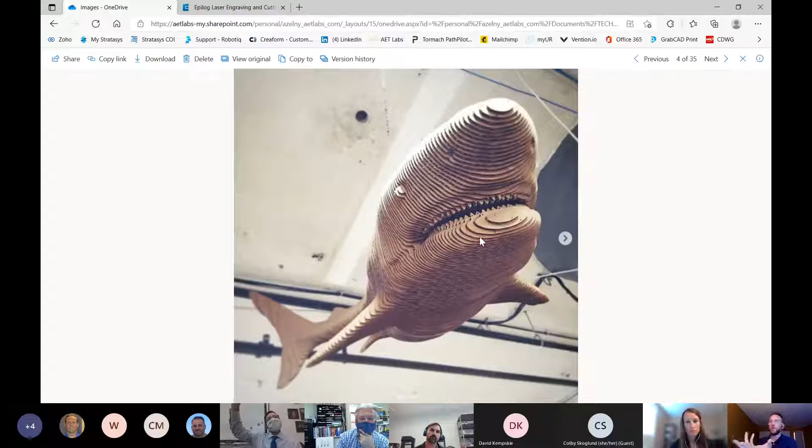Here's a really cool makerspace project that some members did together. So this is all laser cut cardboard. And each of these pieces, the designer of this essentially numbered every single piece and gave instructions in order to assemble it into this 3D shark. Really, really cool project.

Here we have a hinged box. This is just kind of a raw version of it, but this is something that I've actually done with teens in a workshop and adults. And one thing that I definitely stole from someone else's design is this really wonderful bearing design in the sides of the box in order to open the lid. Really cool, clever way to just have everything laser cut.

So furniture, load-bearing furniture is something that I want to talk about today, and that's an example of this right here. I actually have a version of this in my home office that just sits against the wall and holds some stuff like books and instruments and so on. And here are some folks in a workshop that I did at a makerspace in Worcester assembling this piece.

Okay, this is, oh yeah, let me see. If you're new to laser cutting or laser engraving, you might often see glass or wood or maybe acrylic, but what we may not see a lot of is leather. And this is just an example of how beautiful laser engraving looks on leather. And you can see by contrast, to the right of it, there's a rough engraving, but leather and fabric in general is something that I don't see a lot of people doing, but the laser is ripe for incorporating into clothing design and fabric, jewelry like earrings.

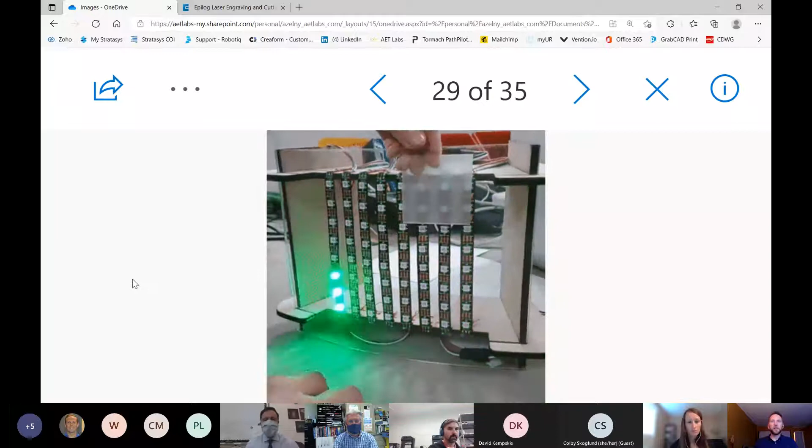So this is just a prototype of a bigger project I'd worked on with a couple of folks. We were making an LED screen, kind of like an artistic installation, but the whole housing for the project is laser cut.

And one thing that I haven't talked to many teachers about is: are you using laser cutters for more than just engraving stuff, making structural things? In this case, you could make a jig for something. And I really was excited to show you this because this is a jig I made to bend a piece of acrylic, and my goal was to heat the acrylic so it would hold the bend. It did not work well, but still it was a pretty neat idea to begin with.

I had never done anything like that before, but all the same, I want to show you this because it didn't occur to me until this time. I was like, oh geez, could I do something to bend this acrylic? I could quickly design something to laser cut that would hold the form. So that's kind of thinking outside the box with the laser, which I like.

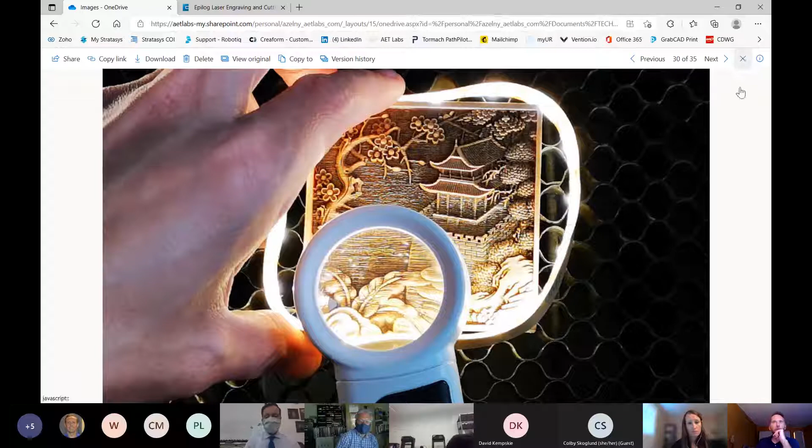Here we have some stuff that is pulled from Epilog Laser's website and some other content from other users, but if you really get into the engraving workflow, lasers, especially Epilog lasers, are geared for this: lasers are capable of doing 3D engraving. I might not touch on that much today, but if you're interested in talking about that a little more, it's a really interesting process, so we can definitely do that. And here's another 3D engraving.

Those of you who've used or have seen rotary devices on CNC machines, it's really a great tool for the laser. We package these Epilog machines with the rotary tools a lot, and it's fantastic for students. They're very easy to use. It's plug and play, and I think students take off with projects, as simple as engraving the school logo on a glass or a water bottle, to developing their own logos or designs for community events or personal use.

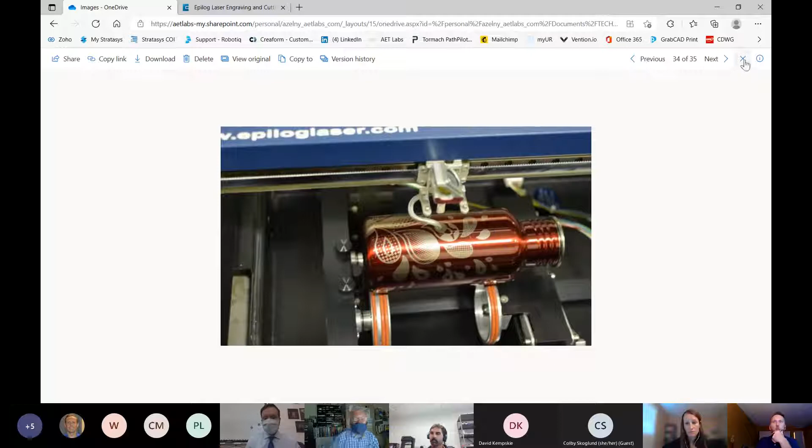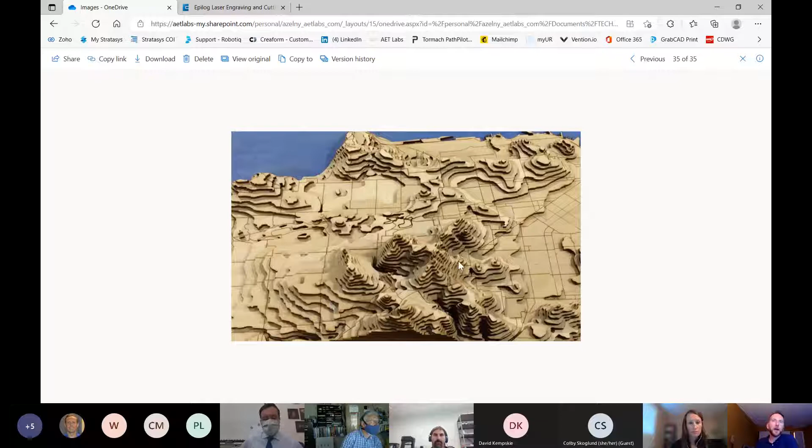And the last one I have is just a 3D rendering of a topographical map. This is an interesting process where you can separate graphical data by color. So if you have a topographical map that is rendered in grayscale, you could essentially pull out all of the profiles of each level of the map, and that could transfer over to a bunch of separate profiles in the laser, where you can cut all these shapes that eventually will stack up to create the 3D topography.

I'm going to switch gears right now. So does anyone have any questions? All right.

Okay, so the next thing I'm going to jump into is the software side. Now, when we work with lasers, I should actually just open some software for you here. But a lot of folks are working with 2D CAD, and that is kind of your default workflow to get to the laser cutter software. You start with 2D CAD, you send your 2D document over to the laser, you set your profiles, and you go ahead and

Oh, looks like we do have a couple questions. All right, hold on one sec. I got to turn my phone to silent mode. Kristen, can you see those questions?

Yeah, from Frank. There he is, he just waved. He's curious about material vendor suggestions. Oh, material vendor suggestions? Yeah. Materials, so I do have a link to Epilog's website, and I know that Epilog, when they ship their lasers, gives you a plethora of vendor samples. So we might have to tap into their website and see if we can find anything.

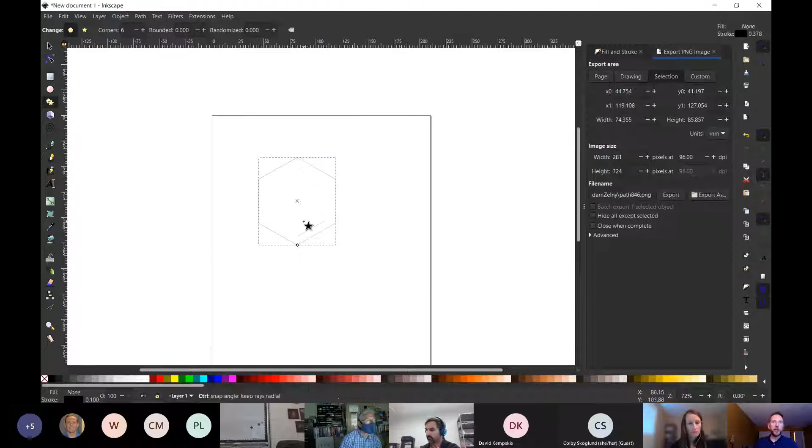So, all right, let me do a share here. Okay, so our typical onboarding workflow with the laser is using some sort of vector-based 2D CAD software. In this case, I have Inkscape open, where we might do something like create a shape, and we might go to Google and look up an image.

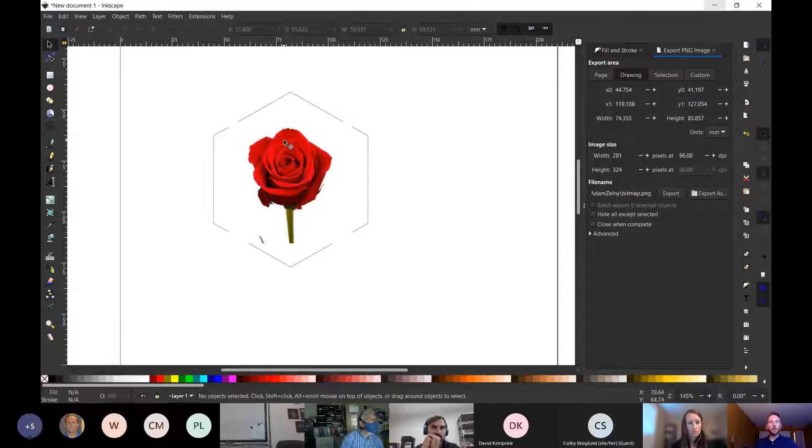We might send something like this over to the laser, where we can start off by talking about rastering, which is the laser's interpretation of pixelated art. So this would be pixelated art here.

You can see that it's blurry as we zoom in, versus vector art, which is geometry, lines connecting points. If we zoom in, nothing changes. It doesn't get pixelated because it's essentially representing a tool path the laser will move on.

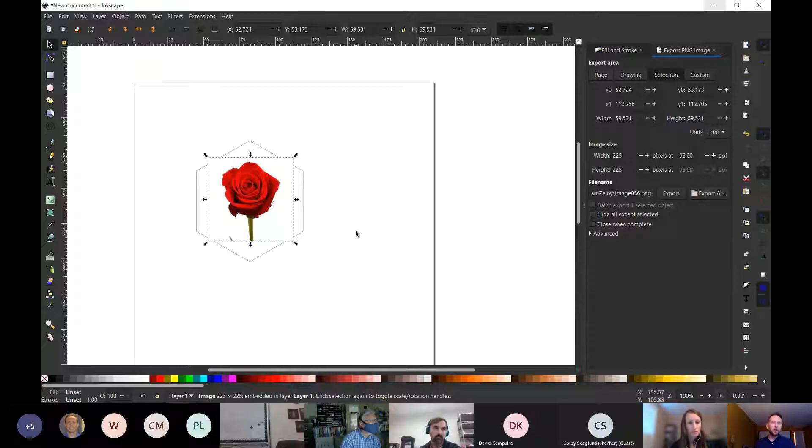And it's a great way to get started. You can even do 3D design. If you have the capacity to plan ahead and have that strong visual thinking, you can lay out slots in a shape and have things connecting to a shape you create in another area of your document.

But if we really want to take advantage of structural design, we can switch over to our CAD software, something like Fusion 360. What I'm going to show you here is, I don't want to say simple, because I've worked with people before who struggled to get the concept at first. I think that despite the fact that our students can be on electronic devices a lot, this does boil down to some thinking they may not be used to.

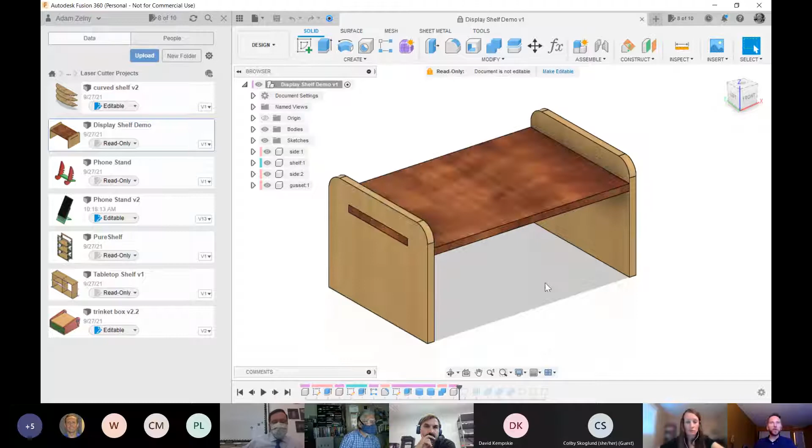Right now it looks not necessarily appealing. It depends on what type of person you are. If you're really excited about having a miniature table, which is like 20 centimeters wide, then that's great. But the purpose of this is to onboard somebody brand new to parametric modeling to, A, the principle of it, and B, the laser workflow.

And you know what I should do before I show this off is show you just one other slide here.

There's a question about any ideas for introducing kerf to students. Sure, a saw blade, like a hand saw, would be a great way to introduce kerf to students. If you have a miter saw, a miter box, or a safety saw depending on your classroom environment, having them hand saw a material like a piece of pine and talk about the fact that they completely made sawdust and removed a portion of that material is a great way to start.

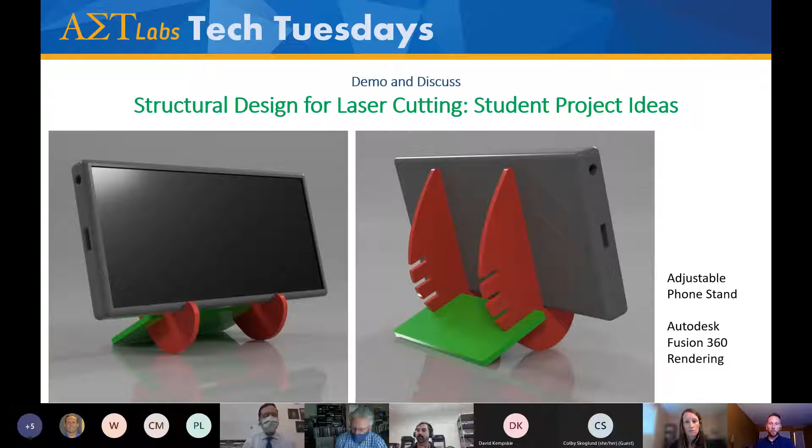That's a nice, clean, easy way that doesn't involve CAD to talk about kerf. And that's great that that's brought up, because my next thing was just to bring this slide up. So before we launch in, the central question is: what is parametric design, and why is it well suited for digital fabrication?

I just made a couple of points here. I'm not big on packing content into slides, because I want to engage in a little show and tell and discussion. But the two points here are: CAD sketches and models are created using variable dimensions that can change relative to one another, which is essentially what parametric modeling boils down to. And the second is dimensions can be quickly adjusted with respect to the size of the material being machined and the kerf of the cutting tool.

So you're going to be working with different sheets of stock, and your stock is never going to be consistent. You'll have a piece of plywood, acrylic, or cardboard. Cardboard's pretty consistent probably, but plywood specifically, you'll find a lot of different widths, and your artwork may need to be updated for that, especially in structural design.

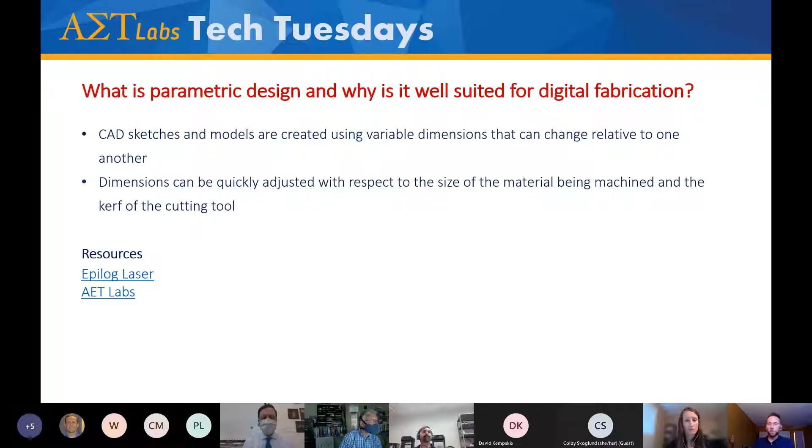So let's pop back over to Fusion.

What we're looking at here is, at current state, a 3-component assembly. This assembly consists of 2 sides and a shelf, and you can see that these are assembled by tab and slot joints.

One thing I love about structural design with laser cutting is it really lends itself to talking about woodworking. So especially if you have students taking a woodworking class, you get to talk about joinery and joints and how things fit together structurally. But we have some constraints with digital fabrication, because we're working with flat stock, so we can only get away with certain types of joints. Tab and slot is really common, and mortise and tenon is another type.

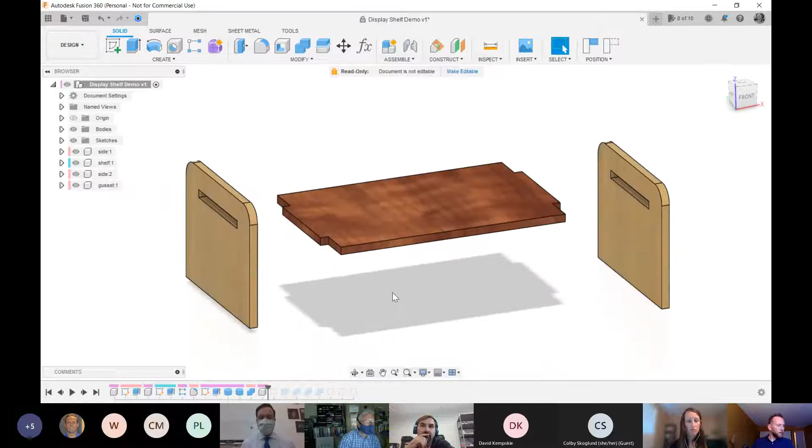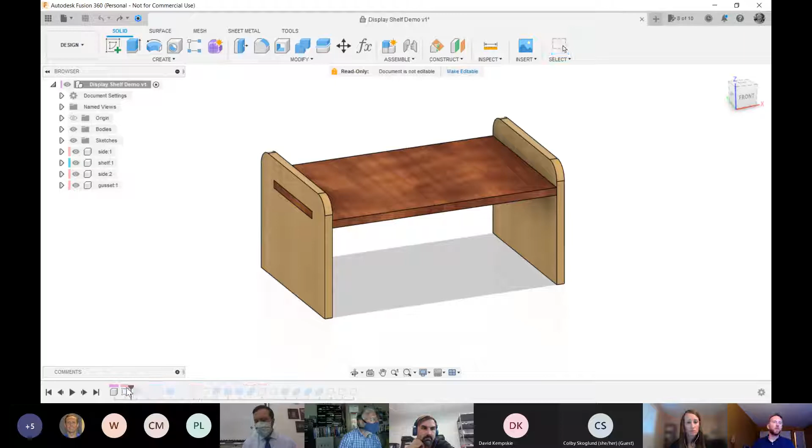So let's dissect this a little bit here. If you're not familiar with Fusion and you are questioning your current 3D CAD platform, this is one thing I love about Fusion - I think a lot of other CAD has this too - is this timeline down here. So I can slide this all the way back and show you what this project looked like at the beginning. And this was it - that was my start right there.

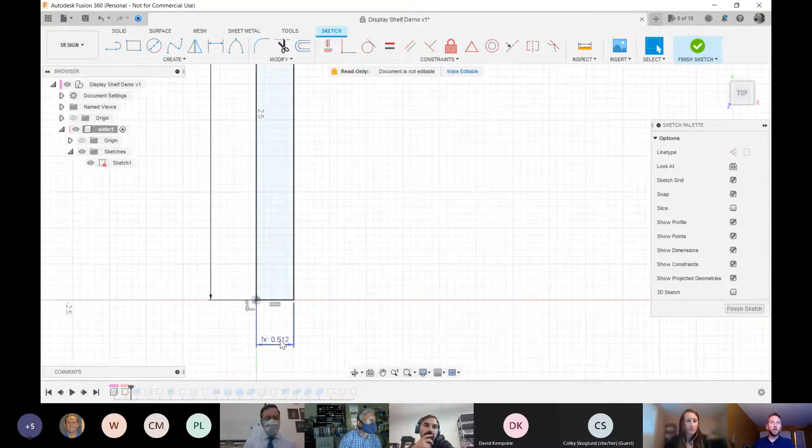So this is just a side profile with a dimension, in this case a parameter. This parameter's depth, and this parameter is thickness, which is a big one, right? So let me pop this back up.

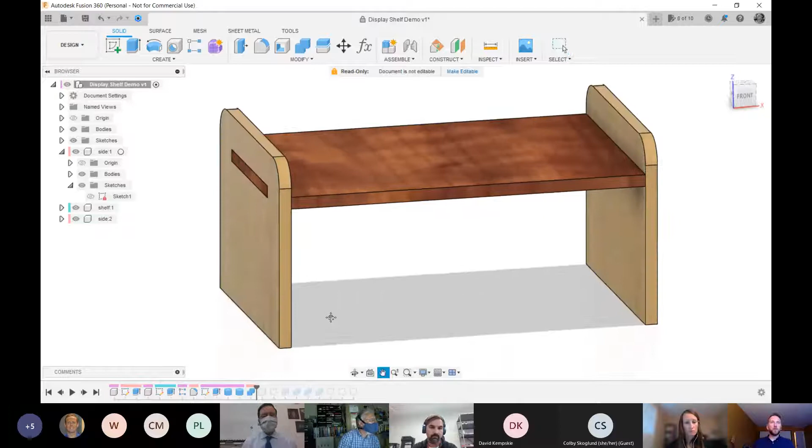All right, so right here we're working with something like 1/4 inch, or a little bit less than 1/4 inch, plywood. But if I'm doing a joint, I need to make sure I know that the thickness of this slot right here is going to accommodate for a tab and slot joint.

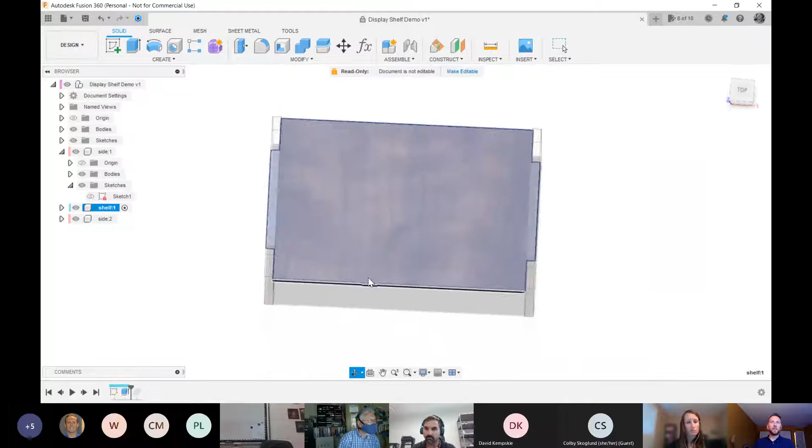So what I do is when I'm creating my sketches - I'm trying to remember where I actually did this sketch - oh, I think it was the shelf itself. So when I created the sketch for the shelf...

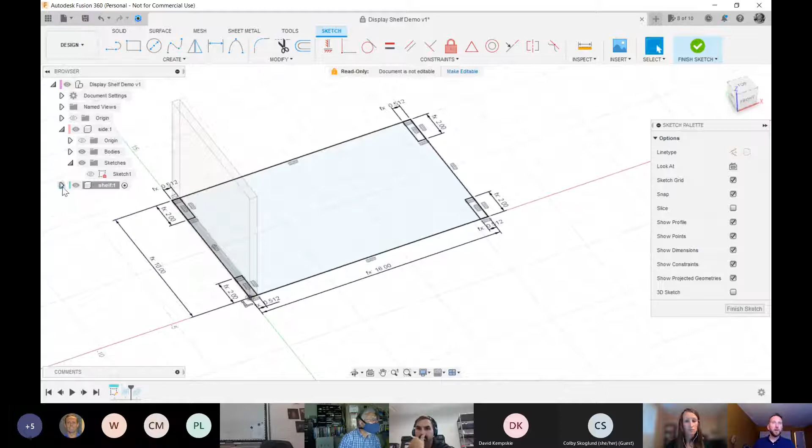I assigned parameters to the sketch with respect to the tab, kind of the length of the tab here, but equally important would be the thickness of the extrusion. And in this case, if we look at the extrusion, we can see that my variable is actually titled thickness.

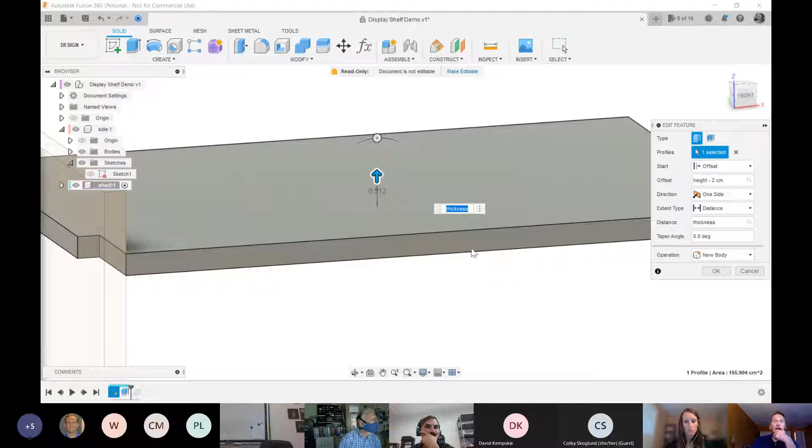Now, at the heart of parametric modeling are parameters, and these parameters are often what we start with. Whenever I start with my designs, I do a sketch first, and I visualize in space with a ruler or a tape measure or calipers at my desk, and I say, what do I want this to look like? Just a rough idea.

Because in parametric design, we can change this to be any size, or just about any size we want, within some limitations. So I make a variable called height, width, depth, thickness, and I add values or expressions to each one. And one thing I love about parametric modeling is math is inherent. So those students who hate math, those students who struggle with math or can't do worksheets - this is where we can tap in and get them excited about math.

Because when we actually apply math to parametric modeling and see changes happen right before our eyes, it's wonderful. I hated math in school, and when I got into parametric modeling, I became a nerd about it. It was great. So yep, here are some values here.

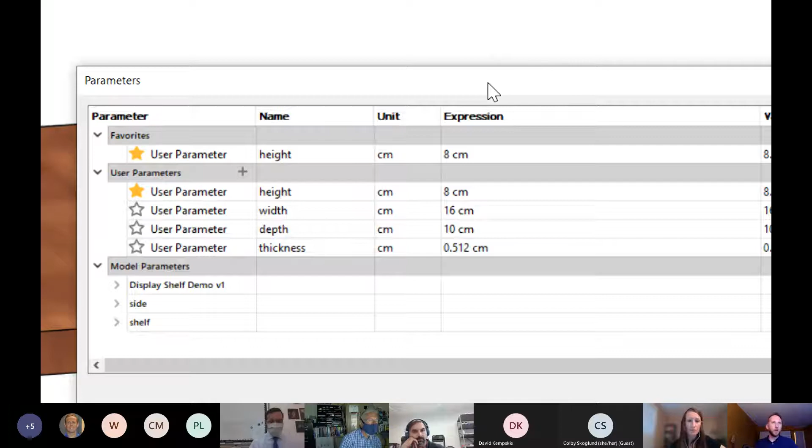This thickness right here, 0.512 centimeters - that's a caliper measurement for my plywood. So I use digital calipers and measure the thickness of the plywood and add that. Of course, it doesn't have to be that - you could start off with something kind of rudimentary, just like 0.5 or 0.4.

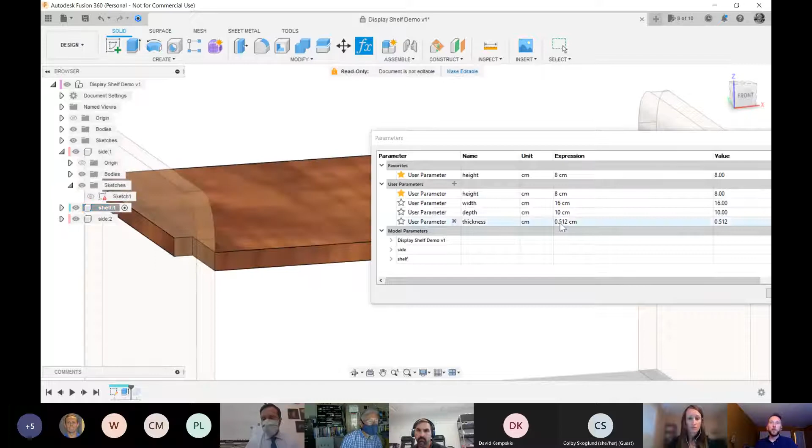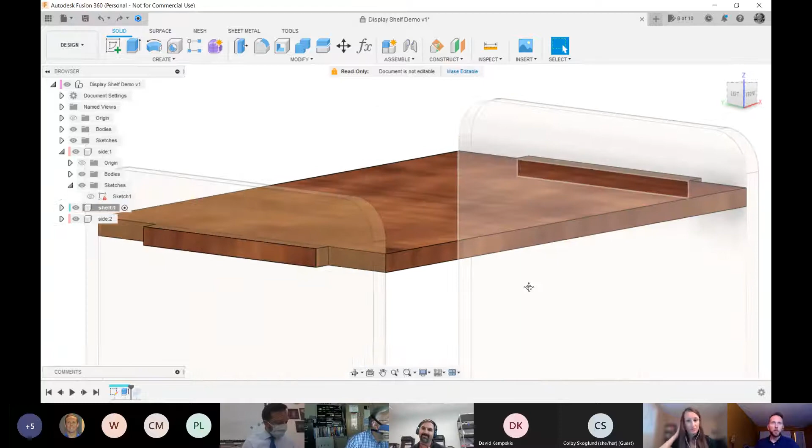And because I have that value attributed to the extrusion, if I change it right here in my parameter spreadsheet to something like 0.75, you can see the shelf panel gets bigger. Not only does the shelf panel get bigger, but everything else updates as well.

So I have two sides that have slots in them, right? And actually, I could just take this apart so you can see it like this.

And when I go into my parameters and change my thickness to, I'm going to do 1, you can see the slots adjust, the tabs adjust. And if my stock is - if I've done an accurate measurement of my stock and understand a little bit more about kerf of a laser cutter - then I will machine this and go to the next steps to machine it and have a really cool project that I can assemble.

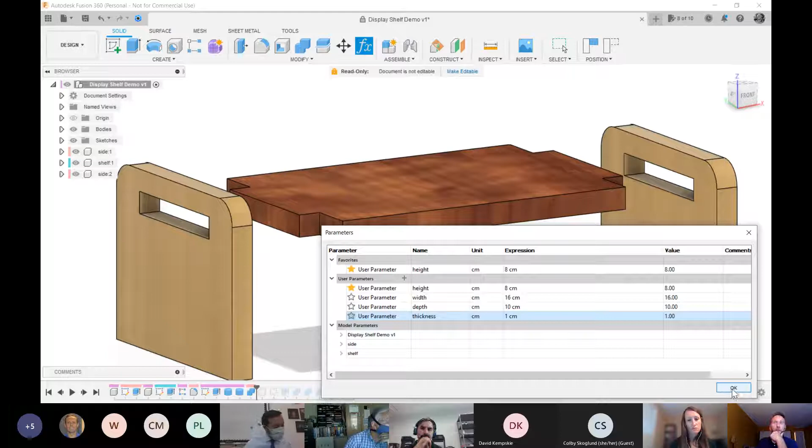At this point I wonder where you and your students' heads are at right now. Do we ask the next question, like, is this structurally sound? What's the answer to that? What would you change? How would you change it? What would your students say? I'd like to invite you right now, if anyone would like to speak up, what's the next step from this? Do you have any ideas? Where would you take this in your classroom? What would your students do with this? Would they be bored by it? Would they kind of take off in imaginative ways?

Would someone be able to assist - this is Casey - in taking Revit blueprints and cutting them on the Epilog Zing? I think you'd need to share the file with me, Casey, in order for me to dig into it a little bit more. I can add a link to my email so you can get in touch with me that way.

Tony asks, do you measure whatever you are using with a digital caliper to be as accurate as possible? You gave a thumbs up because I already talked about it, but yeah, digital calipers, absolutely.

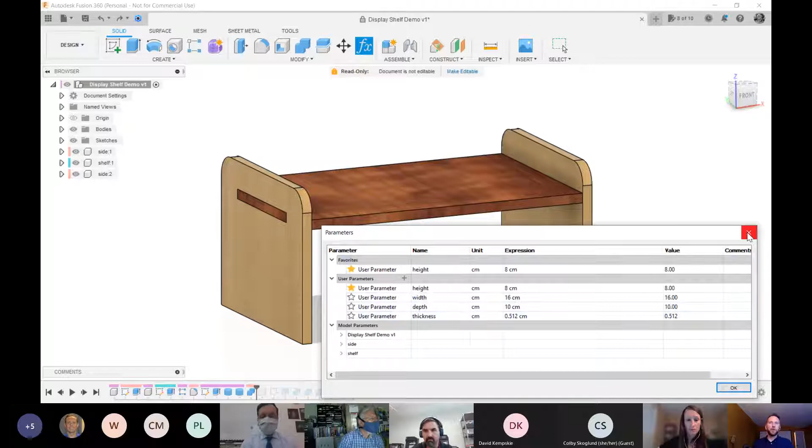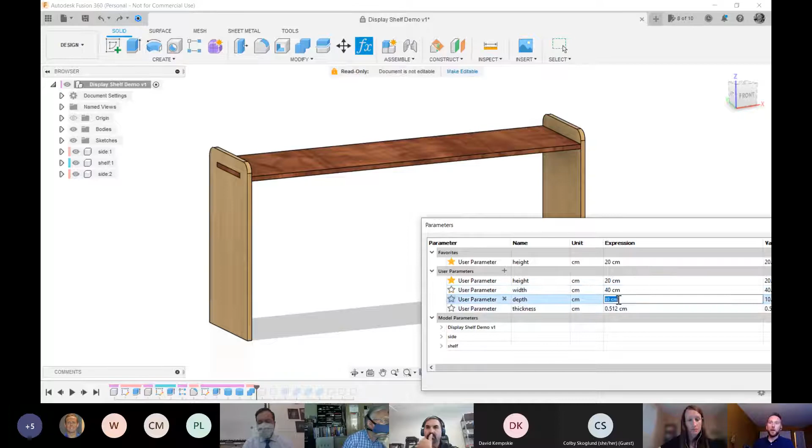Yeah, great. So the next thing I would do from here, I just want to take you on the workflow at this point. Once you've completed your CAD, I want to point out that because I have the height, width, depth, and thickness parameters attributed to a lot of this model, it doesn't just change with the thickness. My height will change if I go to 20 centimeters, then my structure will get taller. Or if I change my width, it can get longer. If I change my depth, it becomes a completely different thing - at this point it's bordering on a coffee table.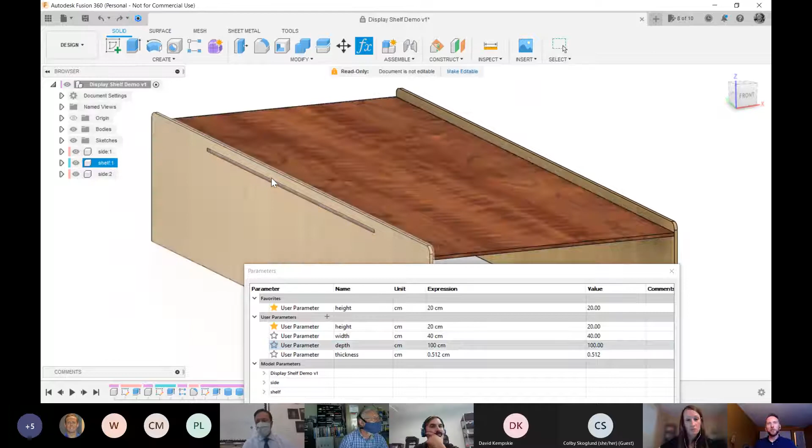I'll also point out that you may have noticed the slot also changes - it changed in size. If you're not too familiar with parametric modeling, this is a great way to start. It's just a simple division equation to do that, and I want to show you that right before I jump into the next thing.

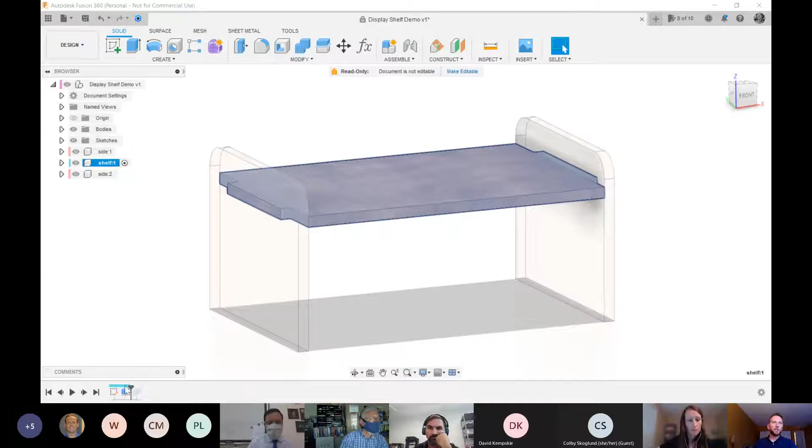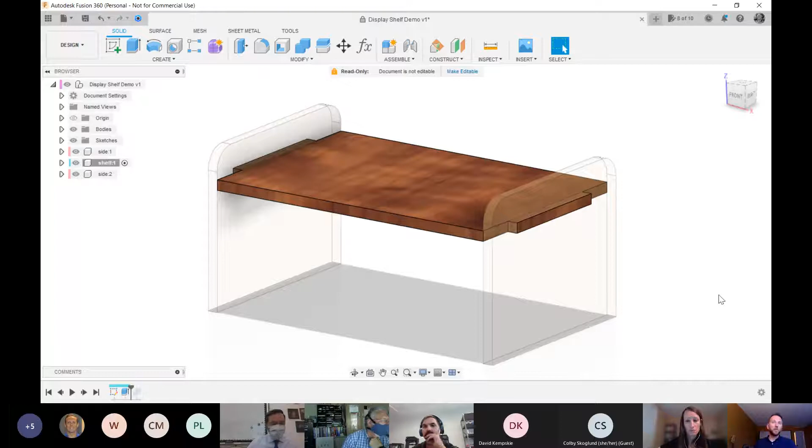That equation is detailed in the shelf sketch, because the shelf really is responsible - the shelf has two roles. The shelf sketch has the tabs, but also the shelf itself, the three-dimensional model, was used as a subtraction piece to remove the slot from the sides. So in my CAD software, whenever I change the shelf, that subtraction piece - this slot right here - is also going to change, because I use the shelf to make that hole.

All right, so let's take a look at this sketch. I popped this up earlier, but we'll take a closer look. Notice I have fx before almost every single measurement here, and that's just representing a parameter - reminding me that I assigned a parameter to this. For example, this front-to-back measurement, if I hover over it, is depth. I know it's very small for you to see, maybe I could do that...

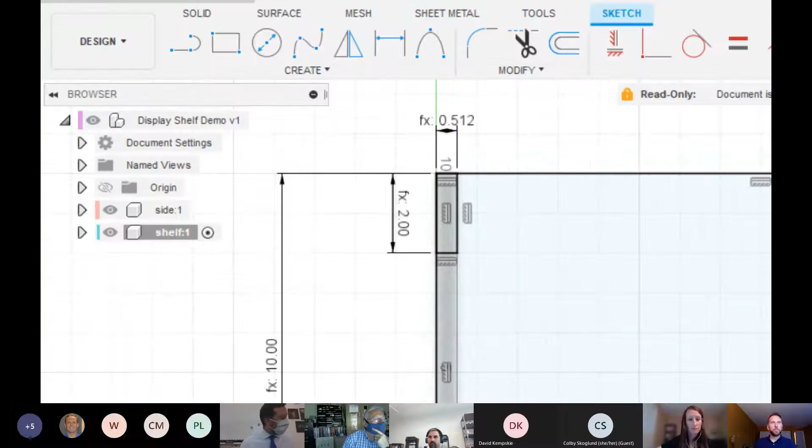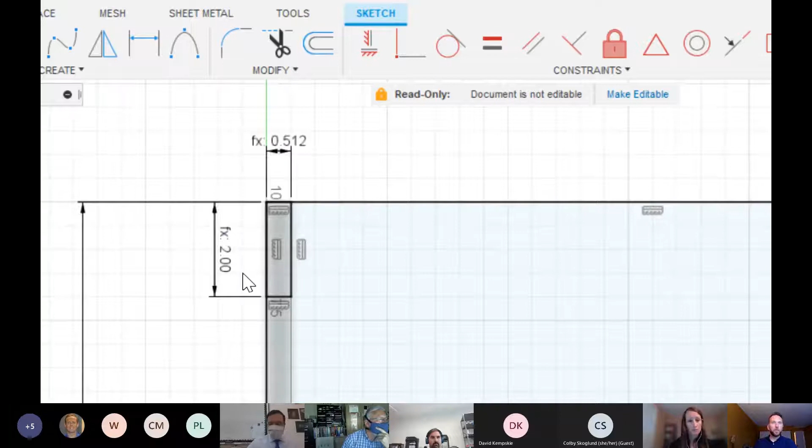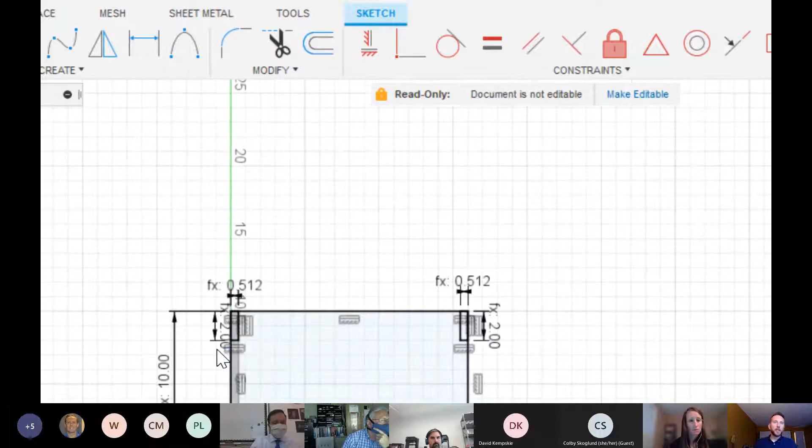So the magic is where the tab elongates based on my depth dimension. If we look at our variable, now I could have made this variable here - I could have made the actual slot a variable, but I ended up doing the spacing between the edge and the inner edge of the slot. This variable is depth divided by 5. So whatever I do, whatever I change with depth, is going to update this dimension right here to be depth divided by 5. In this case, it's 2 - it's just 2 centimeters.

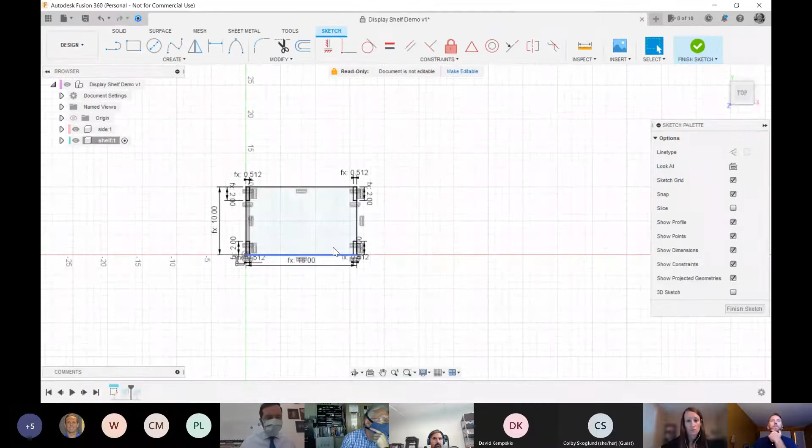All right, so that's kind of a quick intro on how you can bring in your first math equation to alter the dimensions of your model. And I think, if I'm not mistaken, that's all I did as far as actually having an equation - that's the only parameter that has an equation.

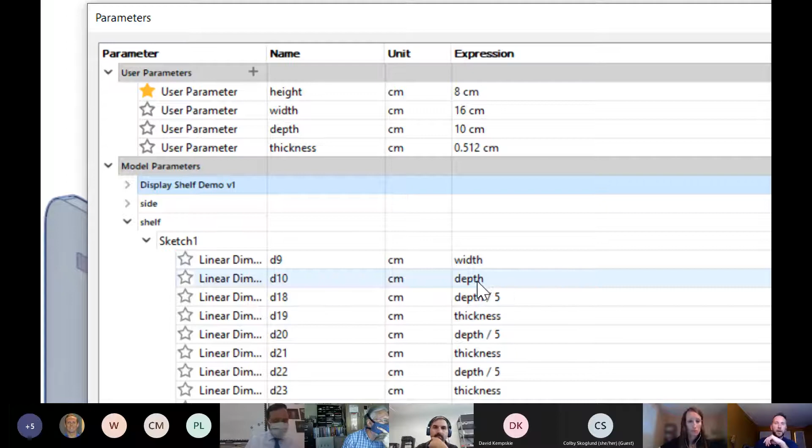What's neat in Fusion is all of this stuff gets captured in kind of the spreadsheet here. If I zoom in, you already saw these dimensions here, but down here I have model parameters that are captured if I enter them somewhere else on the model. In this case, in the shelf, I have all these things in the sketch that I added with depth, but here's depth divided by 5, which happens, I think, 4 times.

If this isn't clear, if I haven't been clear on that process and anyone wants me to reiterate, I can definitely do that. But that's just scratching the surface. If you really enjoy incorporating math into your designs, this can go in a crazy direction. And I have another example that I'll show you later.

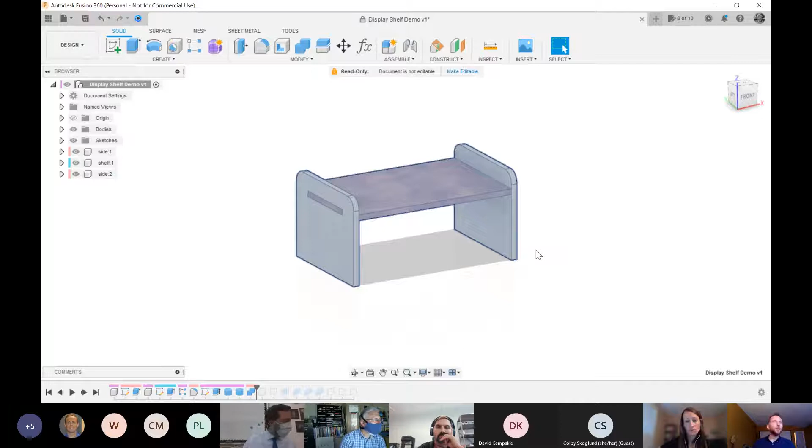Adam, we have some chat, if this is a good time. Yeah, go ahead. Okay. So just going to your question around how would you approach this project? Tony had suggested building a prototype out of something like cardboard, going to wood, and then building actual size, and using that as an opportunity to talk about different materials. Sure.

Yeah, there's nothing wrong with that. I think that cardboard's a good scrap material to start with. You have to be really gentle with it because if you start crushing it, then it kind of becomes useless. But yeah, you can cut it on the laser very easily, and it certainly has structural integrity. So why not?

Frank has a question that either you or anyone else could chime in on: how much time do you spend personalizing the work? Because students would want to add details like raster images and names. Yeah, I think this might differ school to school, but there are a couple of ways you could go. You could set aside a class or even after school time for students to

work specifically on the design side, or if you have any connection with graphic arts instructors in your school, that's a great place to start the conversation and say, hey, my students are looking to do these ornate engravings on their projects. Are you doing vector art with them? Is there any way this could translate over to our laser cutter workflow? And if anyone wants to have a further conversation about that, I'm always eager to hear about interdepartmental work happening at schools. I know it's challenging, but when it happens, it's really exciting, and I think the students get a lot out of it.

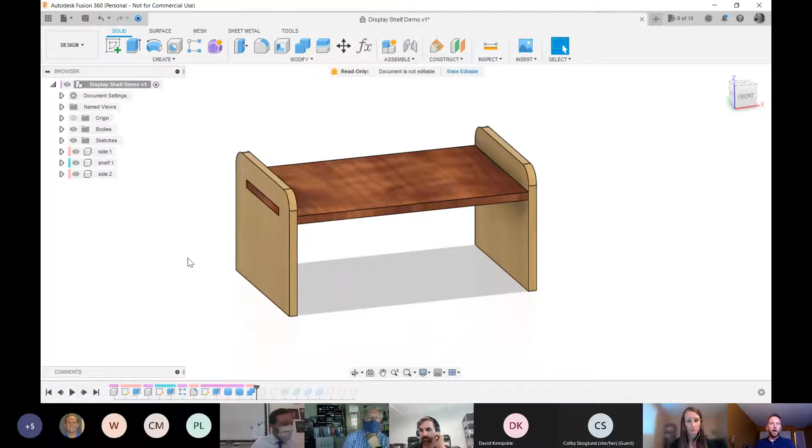Okay, so again, we have a fully parametric shelf that I have variables assigned to. At this point, I'm going to right click on any face of a finished model, a finished body, and I'm going to click Create Sketch and Finish Sketch. And then I'll hover on the shelf top and right click and Create Sketch and Finish Sketch.

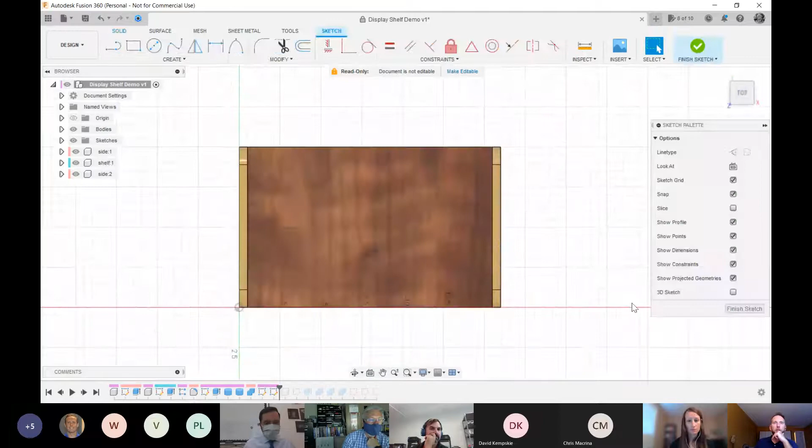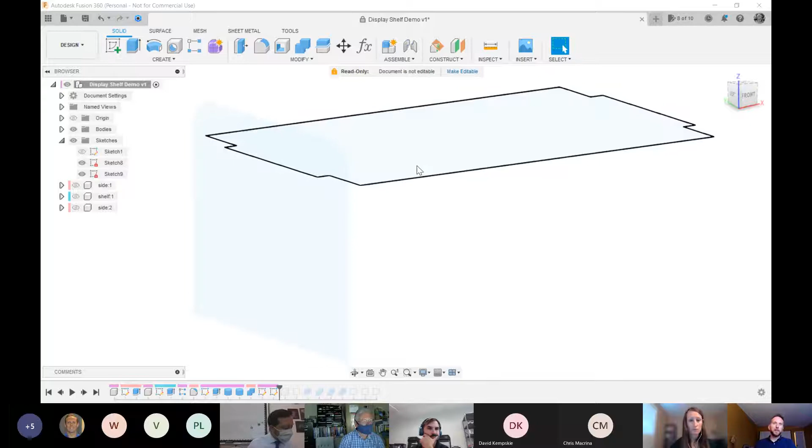What this does is it captures the live face, or the variable face if you will, of this 3D component. And if I hide everything here and just look at my sketches, you can see there are now two very light sketch profiles. Now, the beauty about this, and I don't know if it works like this in other software, is I say it's like a variable sketch, because if I go in and change my parameters right now, and I change, let's say, my thickness to 1, you can see that my sketch is updated based on what's changed in the 3D model.

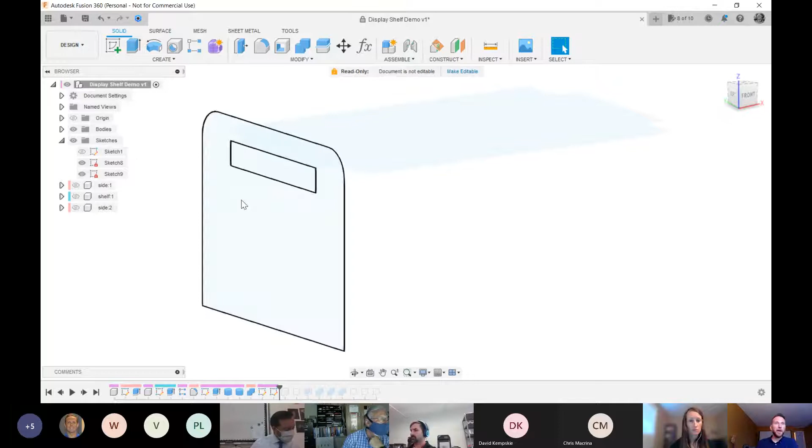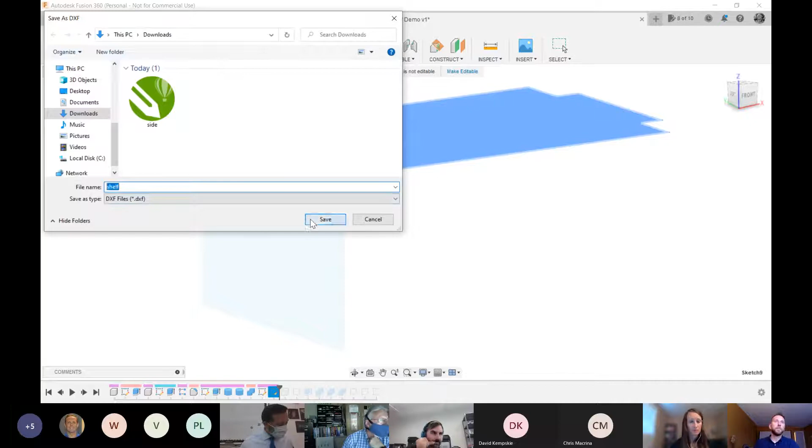And this is our last step, because at this point we have a variable sketch that we can change on the fly. And if this sketch matches our stock size, we can right click on our sketch, save as DXF, and we'll do side. Save as DXF for the shelf. And pull up our CAD software. And import shelf and side. Oh, I might only be able to do one at a time here.

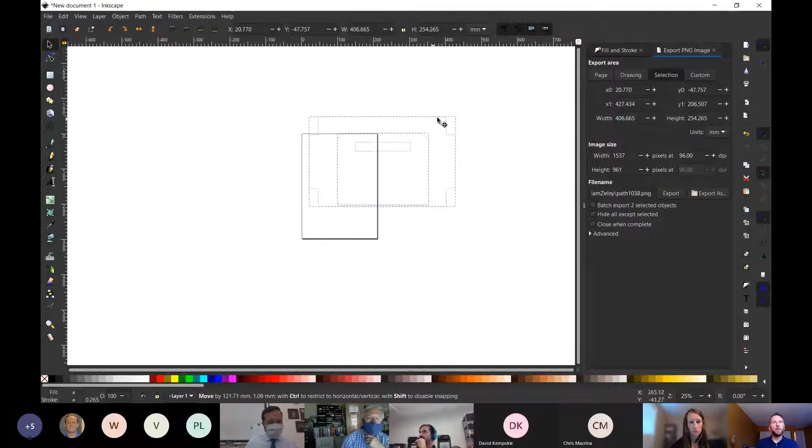All right, and what we're seeing here is probably not an accurate dimension, because you need to make sure that your 2D CAD is reading the unit measurement that you have in your 3D CAD. So for example, in Fusion I'm using centimeter measurement, and I would need to make sure my import is also in centimeters. In this case, it's probably not. But the ratio is correct, and you can basically see what's needed here.

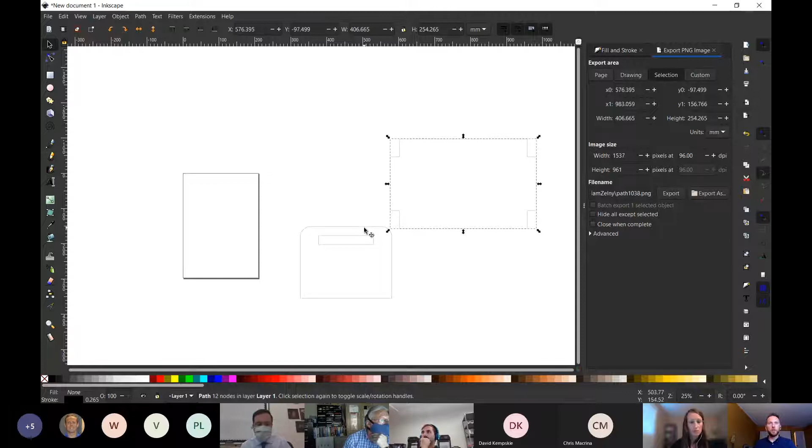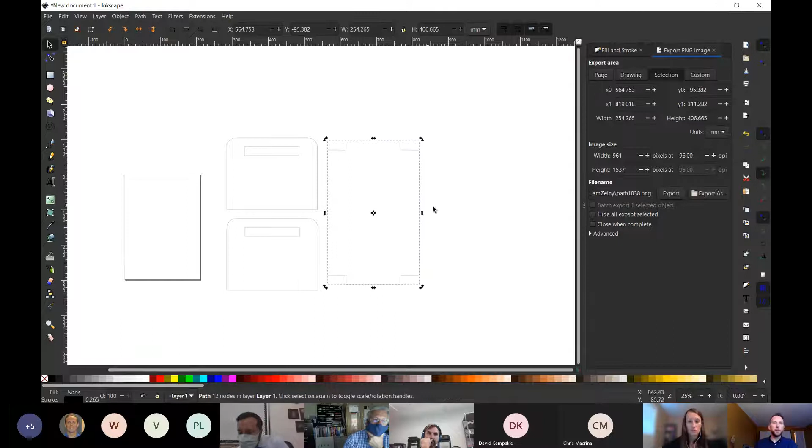So there's the shelf. Here is the side that I can just duplicate because it's symmetrical. And now I can do what's called nesting. Nesting, if you're not familiar with it, is laying your parts out in the most efficient way to maximize use of stock on a laser. So I'm going to draw, let's say, a square here. So let's say this represents our, I should make all this kind of dark.

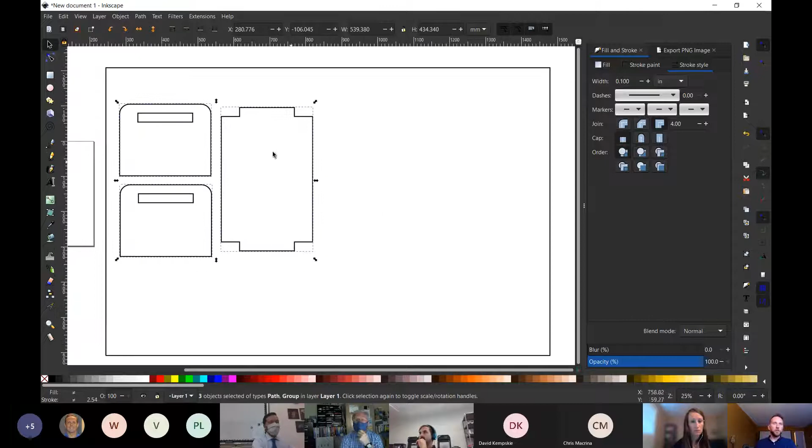So let's say this big rectangle represents our stock, and this is our cut. This is a great problem-solving challenge for the students too, to say, okay, what's going to be optimal here? A lot of bright kids will get this right away, but with laser cutting, you can really maximize efficiency by sharing lines. So you could really have everything touching like this.

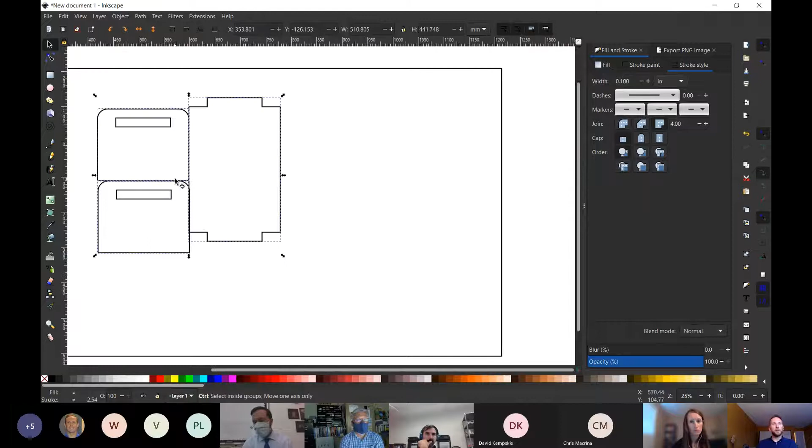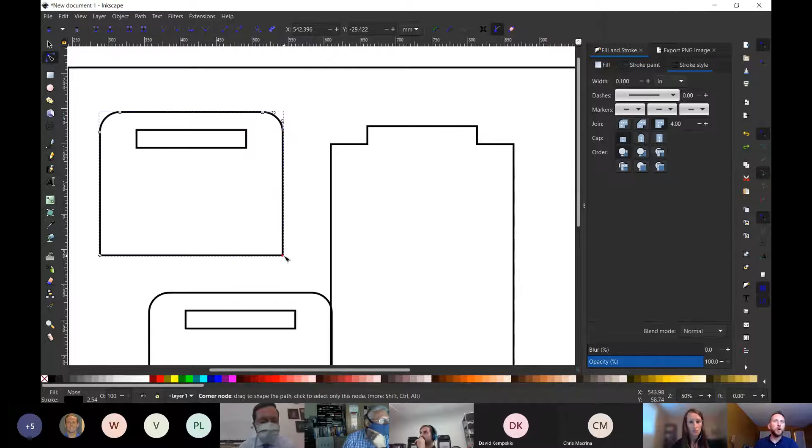And then from here, if your students are familiar with, and again, this is stuff that happens in a graphic design class, editing vector art, they can do stuff like remove a piece of geometry. Oh, let me find this. Oops, sorry, bear with me here. So essentially remove a piece of geometry between two nodes. So we have a node here and a node there. There we go.

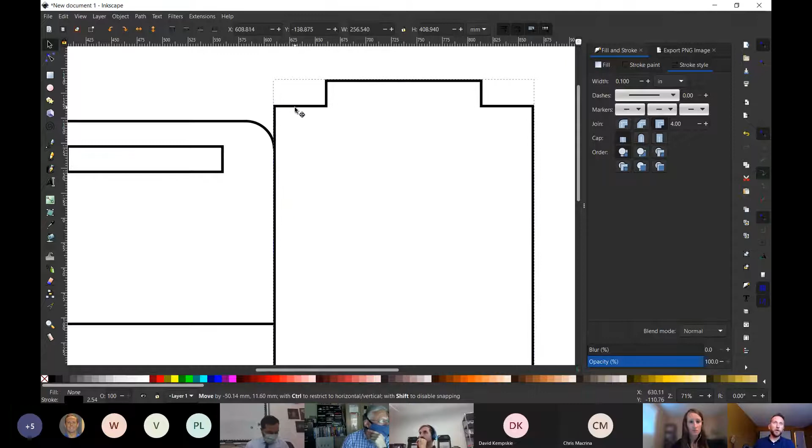And right now, let's say I'm using a really expensive piece of stock and this is really important, we could do something like this. We could use the toolpath from this piece to also share the cut with this piece, if that makes sense to you. And from here, we're sending it over to the Epilog job manager and doing our cut.

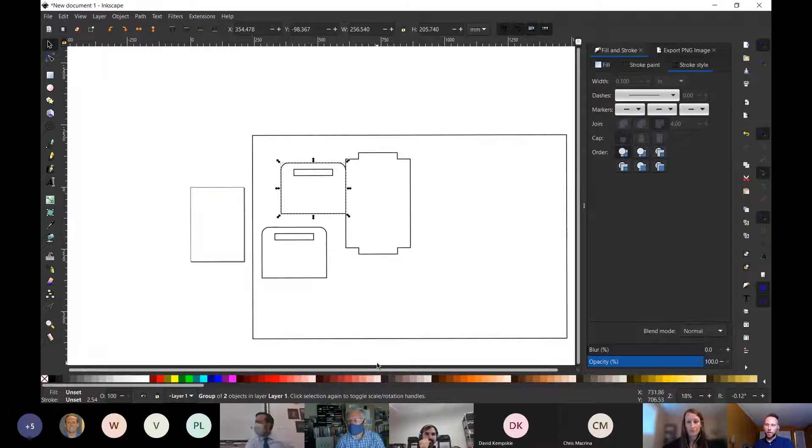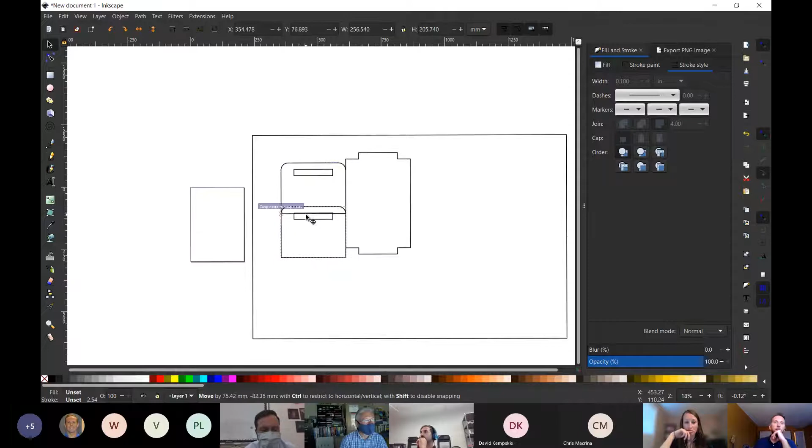All right, someone asks, is this Frank? Yep. Do you also suggest introducing nesting? I find that some kiddos like to cut directly out of the center of a board, creating a bunch of waste. Oh yeah, so we're just talking about that right now. Yeah, here we would position this up into the corner.

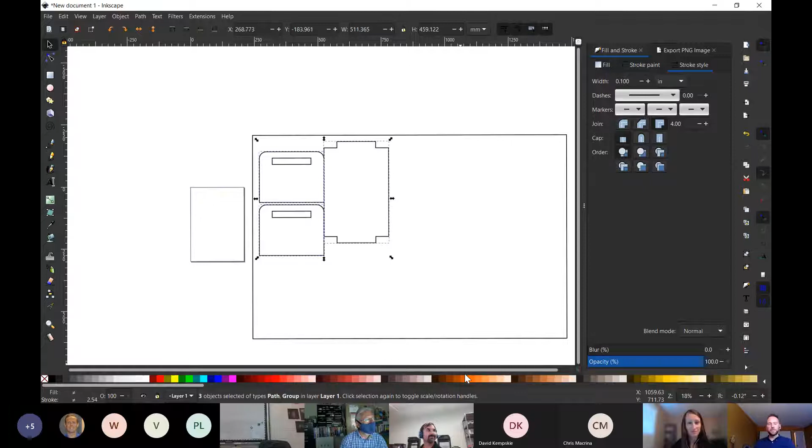And Tony talked about cardboard. Start your students with cardboard. What a great way to make use of the kitchen's cardboard waste at your school. And it's kind of a cool thing to walk up to your kitchen staff and say, our students have been doing a lot of laser cutting, could you maybe put some really nice cardboard aside for us? Yeah. So that's kind of just the quick workflow on that side.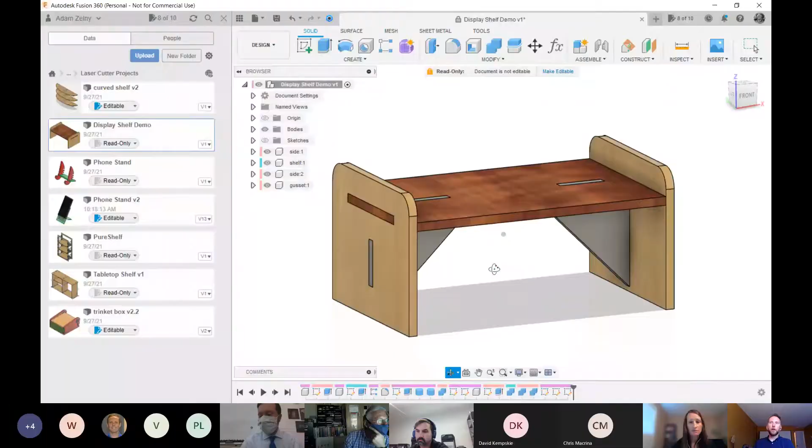So here's the model with gussets. These gussets are situated over here as a component, and the sketch for the gusset has a bunch of variables. You can see I put a measurement on the tab itself, and it is width divided by 6. I have a static angle of 45 degrees to the gusset. That won't change. That'll always stay at 45 degrees.

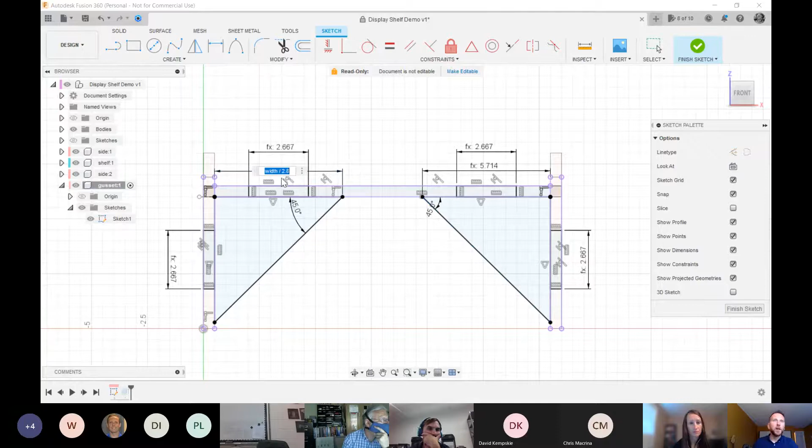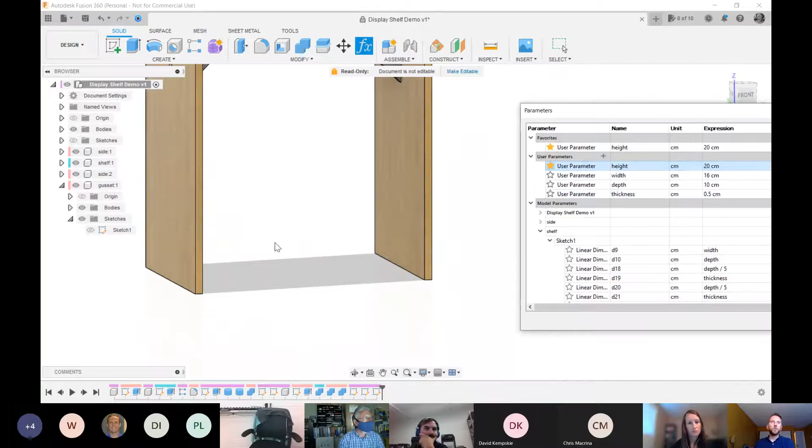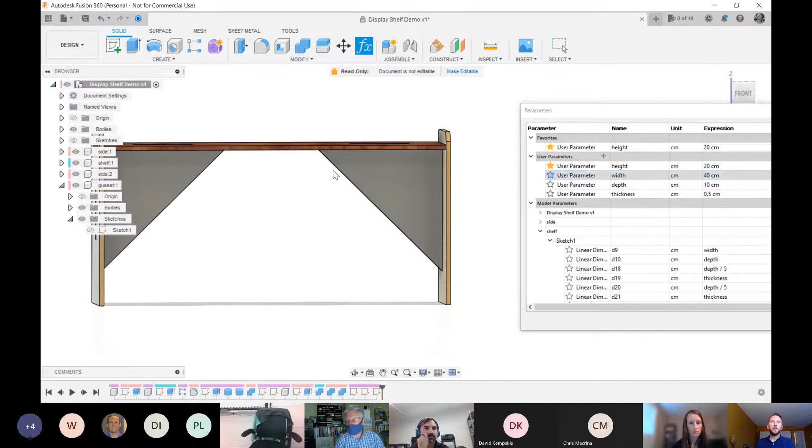And then I have a width of the gusset to be width divided by 2.8. I think I did this just off the cuff, being like, okay, what might be the best size? So when I update something like the height, the gusset won't change, which I absolutely could do by creating parameters for the angle to change, so it would slope down at a steeper angle and maintain this width. But if I do change width here, see, the gusset actually does adjust to become bigger, increasing the stability of the structure. Gussets are pretty cool.

Oh, thanks, Dave. Yeah, Dave included in the text a resource for laser cut boxes, and I had other stuff I wanted to show off here, but one of them was creating finger joints. It's a big one with laser cutters, and the math that goes into producing parametric finger joints is bonkers. It's so much fun and kind of a headache at first, but once you figure it out, it's really, really, really neat.

And you know, we got a couple minutes left. I may as well just bring it up. Adam, yeah, one question related to that. Have you been able to find any macros to make finger joints? I guess I'm not sure what you mean by macros in this context. Whatever the Fusion equivalent is to a pre-recorded set of routines. Like in Onshape, there is a finger joint. They just call it feature script. Gotcha. It's a script that's written, right? Yeah. For Fusion, that's a great question, like an add-on. Yeah, so in Fusion, they're called add-ons, right? Yeah.

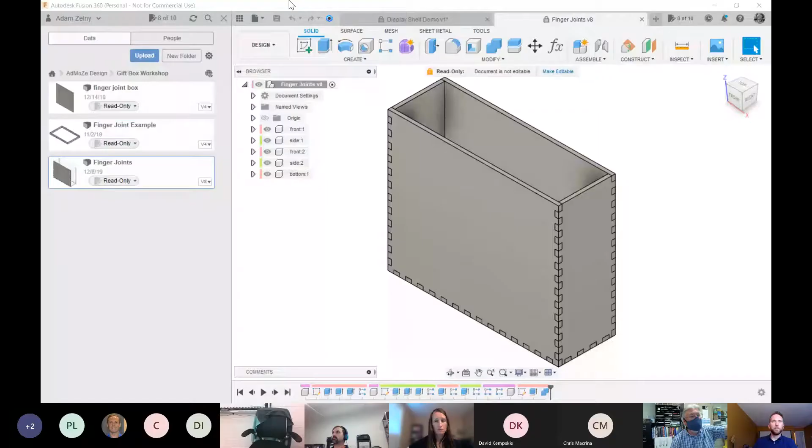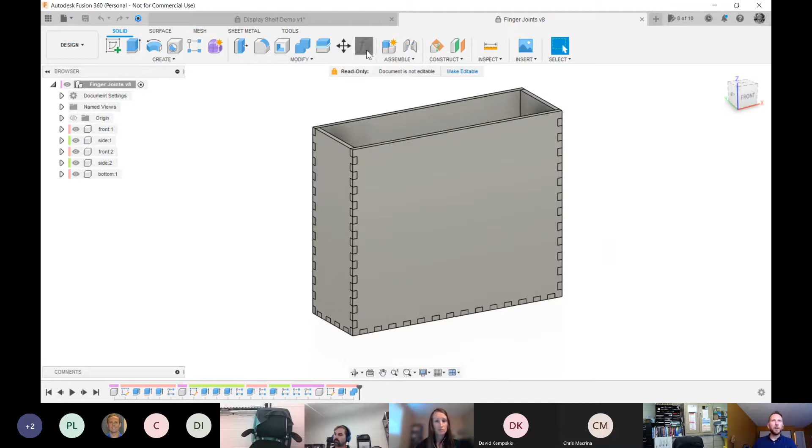Yeah, this is neat. So this right here, here are my parameters: height, width, depth, thickness, finger amount height, finger amount width, finger amount depth. And these are numerical values as opposed to measurement values. Unit values. And I should also show you, here's some of the math that's happening in here. This one right here. It looks like space distribution, negative height divided by finger amount height plus 0.5. So that sort of stuff comes into play. And for me, when I figured that out, it was like a celebration.

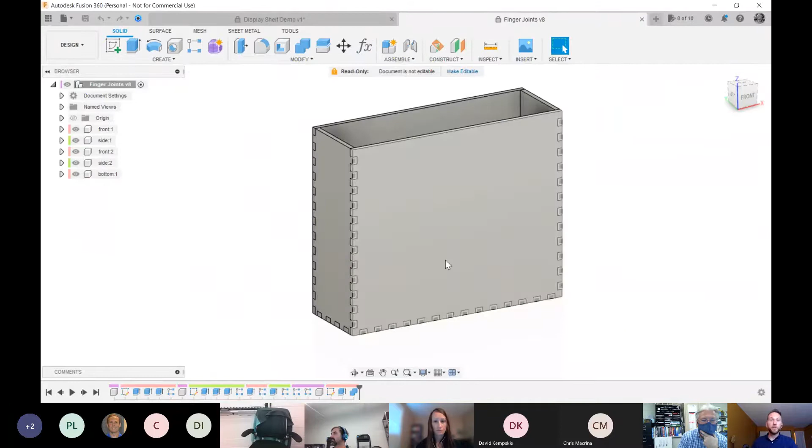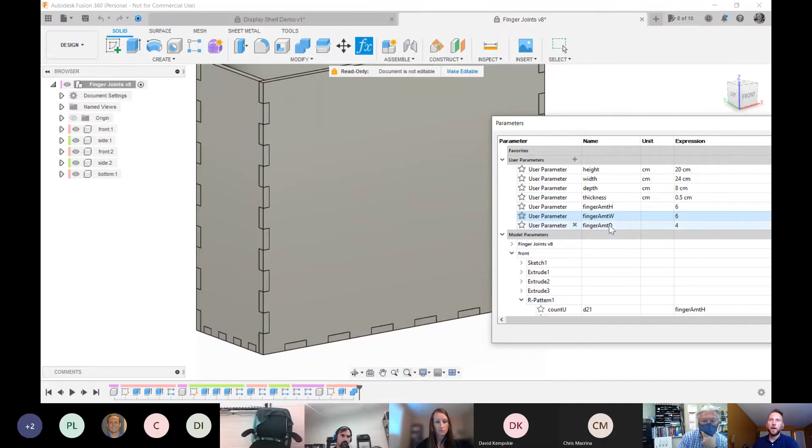But what I love about this is here you can set your optimal finger numbers. So right now I have finger amount height 12. I can switch this to 6, and it beefs up the fingers. So now they're thicker, or longer, I should say. Same thing with the width. I could say 6. And you can see on the bottom, it just updates. For the depth, if I do 1, I haven't tried this, but yeah, look at that, 1, perfect. Yeah, so this is great.

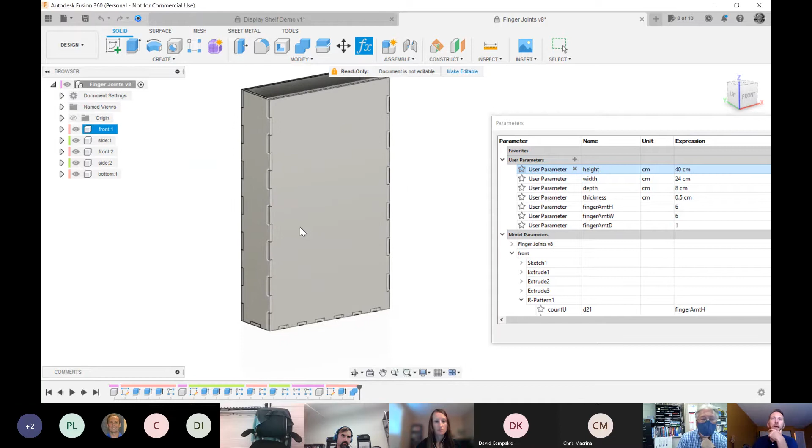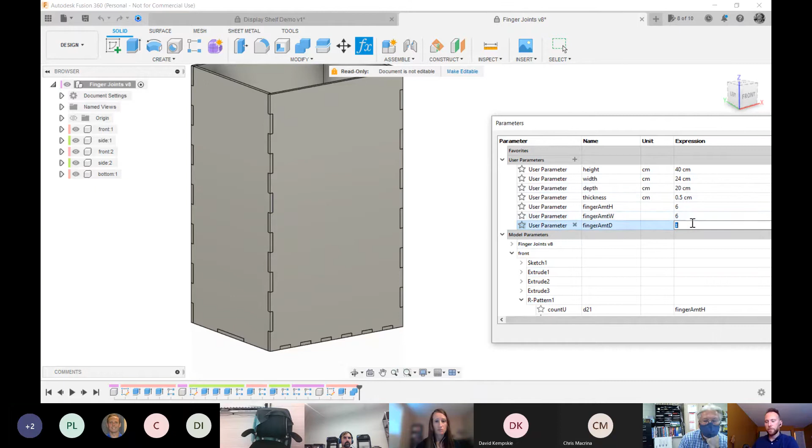And another thing about this one that's really interesting is, I don't think I've done the math for this, but if I change height to 40, this one will elongate the dimension of the fingers, just like that last one. And it preserves the finger numbers. So if you wanted to change the height, width, depth, you would have to also update the finger amount. Pretty cool though, I gotta say. What's great about this is once you have that math locked in, you know how to apply it and where to apply it. You can have this kind of default file ready to go. So there's that.